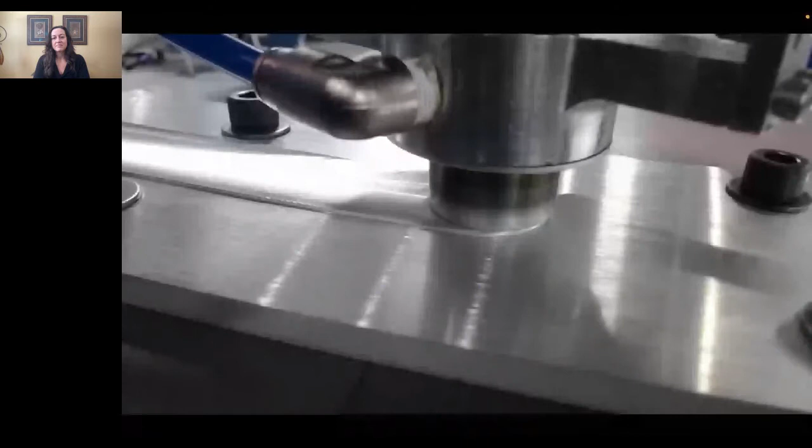So here's your substrate, simple fixturing. And then you'll also notice right away that we're in open air, making this very large part - a 10-foot cylinder in aluminum 6061. I heard someone just ask Miranda about that. So we are printing here in the 6000 series, and that's about 3 meters in diameter.

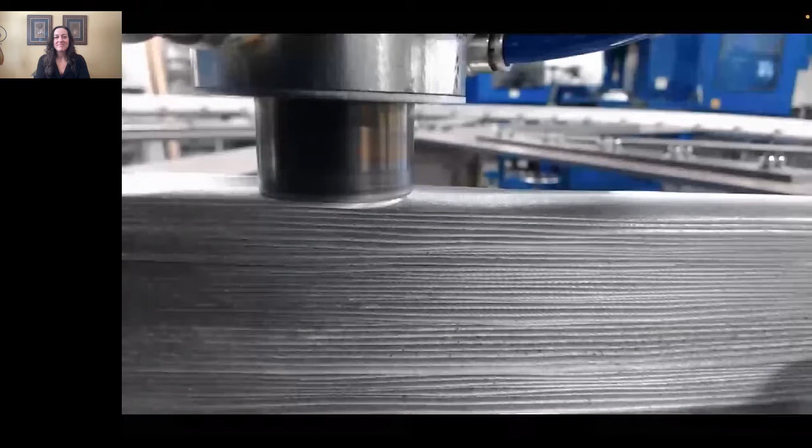Really simple concept. This material is under force in the z-axis and also is benefiting from shear forces that are created during the rotation of the tool. This allows us to put enough energy into the material that we're printing for it to plastically deform, and simultaneously to put energy into the material we're printing onto for it to plastically deform just under the point of deposition.

This allows these two materials to literally be stirred together. You can see discrete layers here as you stand on the outside of the part, but this outside edge will be machined away. And if we were to look at a cross section of that material after the machining away of this exterior skin, we wouldn't even be able to tell that it had been 3D printed. There would be no evidence of these layers. The microstructure will be uniform through the layers and in every direction of the print.

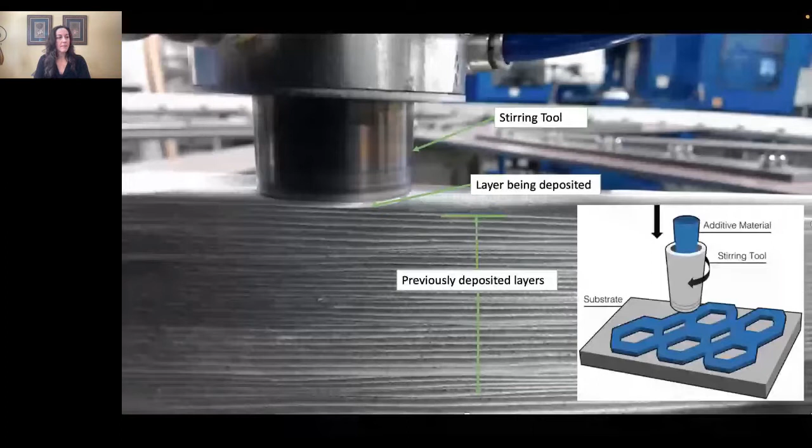So in terms of the program and the opportunities that Meld offers, and in fact where Meld's place is as a process in the AM market, it all comes down to the fact that it's a no-melt process. It's just another tool in the toolkit, and really on one end of the spectrum in terms of size and print rate. We make trades all the time, and so we can talk about some of those in a bit. You saw the high print rate.

We talked about fully dense, wrought properties, great properties from the printed material, and we talked about its simplicity. The great thing about a simple process is that it lends itself to predictability and repeatability. And we'll talk more about what you can print with, but this technology has so much freedom for the user, so much flexibility.

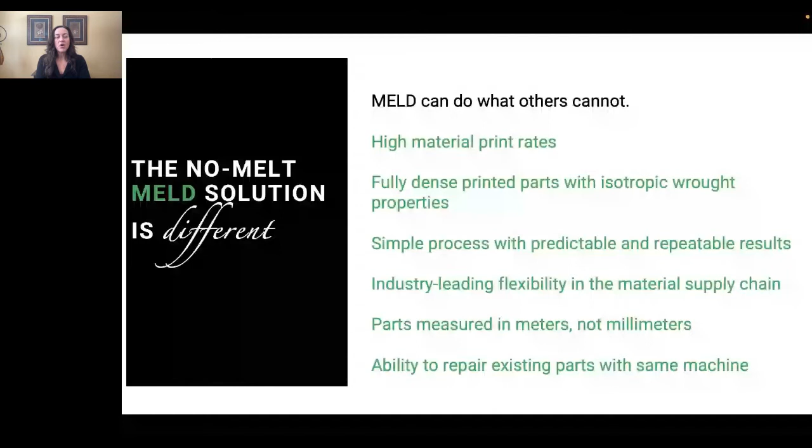This is a great time to navigate around supply chain challenges with the materials available to us. And we looked at a record-breaking part being built. We feel big is beautiful, and that meld was made for parts measured in meters, not millimeters. And one thing I'm personally very excited about is the opportunity, with the same machine and same process, to conduct repairs. Whether it's cast parts or forged parts, it doesn't matter. You have an opportunity to put a part on a machine in open air and add back material. And with sustainability top of mind for all of us, this is a great tool for that.

So let's talk about how this technology is being used for the world's largest printer, and how big is the world's largest printer, and whose printer is it? This is something that we're so excited to be a part of. There's a team of people working on it, but ultimately it's being led by the U.S. Army, and some of the information I'm about to share is courtesy of the Army.

The program is focused on designing and manufacturing now a printer with a build space of 20 feet by 30 feet by 12 feet in height. The equivalent is just over 6 meters by 9 meters by almost 4 meters in height. Really mind-blowing dimensions. So with this printer and the Meld technology, we will be printing parts at a scale never seen before.

And when I say parts, this is what I mean. I mean entire ground vehicles. Very, very excited to share this with you all.

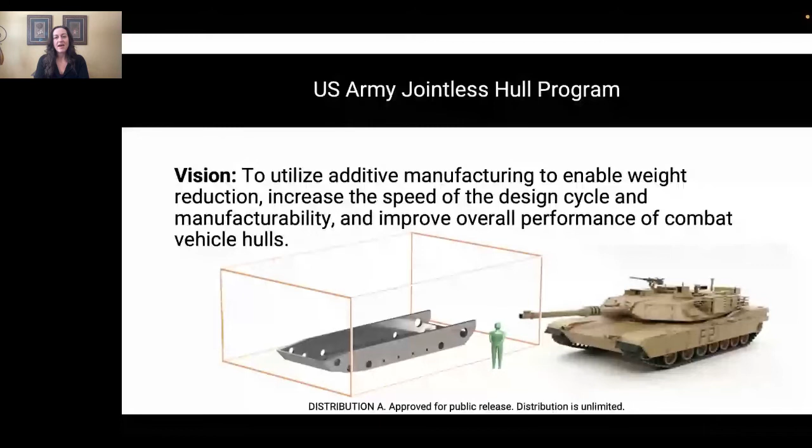So the program's objectives are very simple: to build a tool that allows printing at this magnitude, to develop the qualification and expertise in parts and alloys using this technology at this scale, to utilize the Center of Excellence for Advanced Manufacturing at Rock Island Arsenal for the printer and the development, and also to leverage a smaller scale printer in which some of the qualification activities can be conducted, and then to print and utilize this technology.

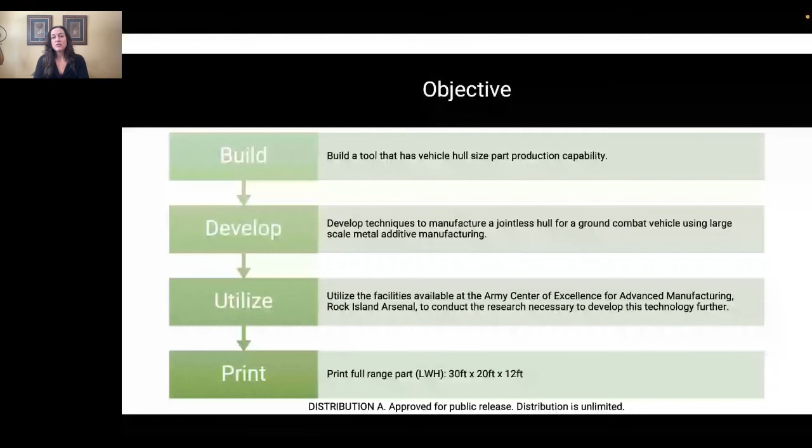So when we think about the considerations for which technology should be leveraged for a printer of this scale, many of the same objectives that probably all of you consider in your manufacturing responsibilities were considered. Size - it needs to be a technology that can print parts of this size. When we're talking about gigantic parts, speed of print matters, and materials is a special consideration here because this is a tool for generations to come to leverage. So it needs to be able to use today's materials, tomorrow's materials, and the future's materials.

And this is something that Meld was uniquely able to offer to the program. Quality and performance are always of utmost importance, as is cost. And cost is about the process itself, about the logistics around the process, about the infrastructure for the process, how much power it might take, or if it requires atmospheric shielding, but it's also about the raw materials. And one of the great things about the meld process is that off-the-shelf material can be used.

So as I mentioned, these are solid rods that go into the printer - not powder, not wire, not a material whose chemistry was especially developed for additive.

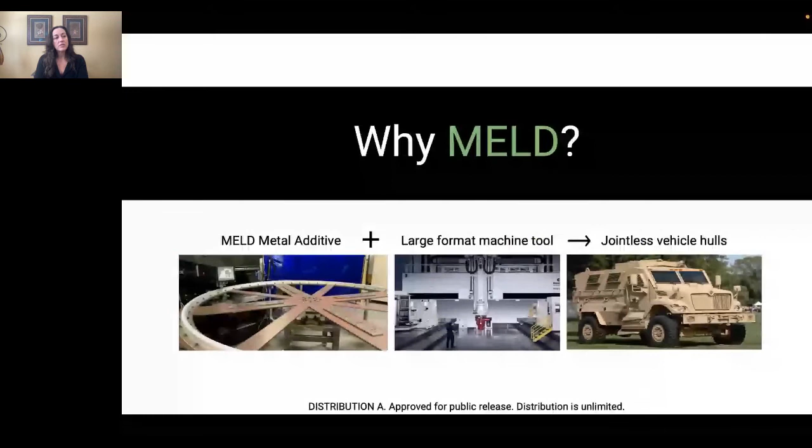So these are some of the considerations and reasons why this solid state process is really well suited to be the additive tool on a large format machine that will also be subtractive, to build these jointless vehicle hulls. Some of the other things considered and observed about the technology during the competitive process in which it was selected was the demonstrated ability to make complex geometries and also to build larger components with very thick wall thicknesses.

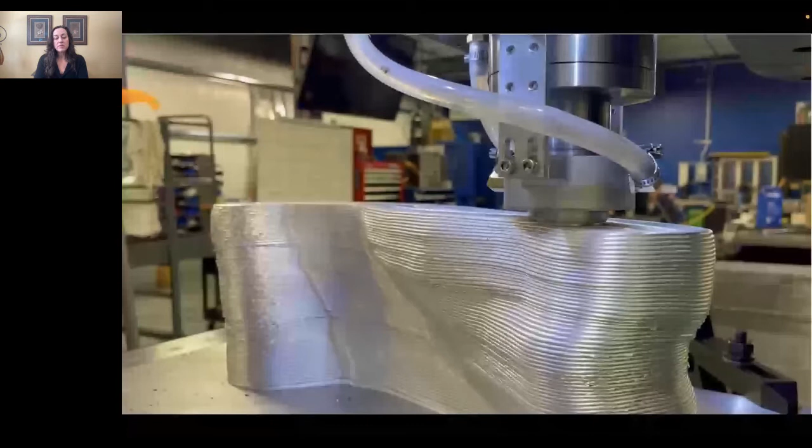And here again, we can see open air printing and that stirring action. We talked previously about the dynamic recrystallization that occurs at the point of deposition. What this allows is grain refinement, and grain refinement has a lot of good properties and outcomes for performance.

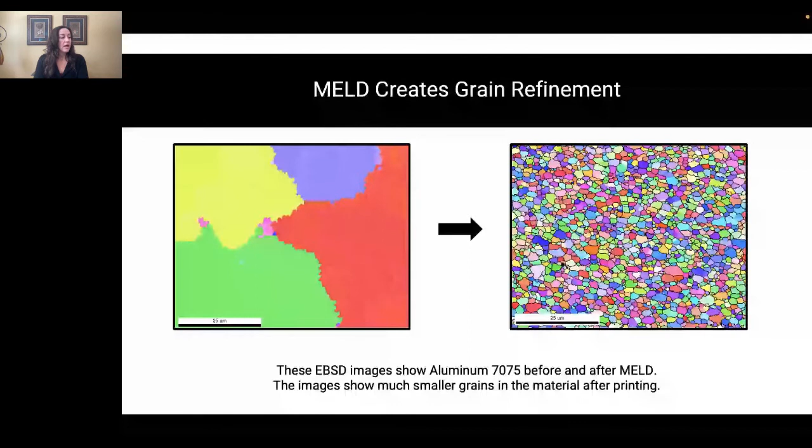Like greater wear resistance, greater corrosion resistance, and often greater strength. And this is a contributor to what we see in materials where we have qualified against forging standards. And this, of course, was of great interest to the Army in the selection of meld for the printer as well. So aluminums, magnesium great for lightweighting, titanium great for lightweighting, but stainless steel, nickel-based super alloys, all printing to a forged standard.

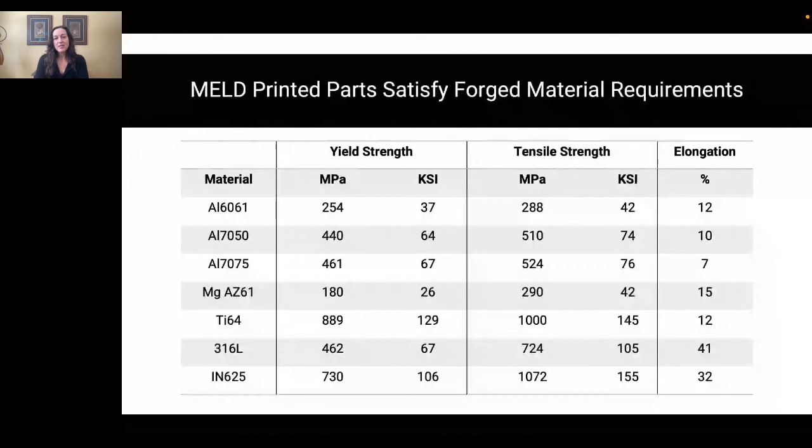And I know it was asked about aluminum 6000 series in the previous presentation, and that is something we can do. That's one of the great things about a non-fusion based process is so many more alloys are available to us to print. You can see here a 7075, but 2000 series as well. These are fantastic alloys, especially for the aerospace industry who is interested in utilizing them for lightweighting. And lightweighting is relevant not only to aerospace, but to space, to ships, to trains, to ground vehicles. Lots of opportunity around these alloys, and now we can really unlock their potential by combining them with a 3D printing technology.

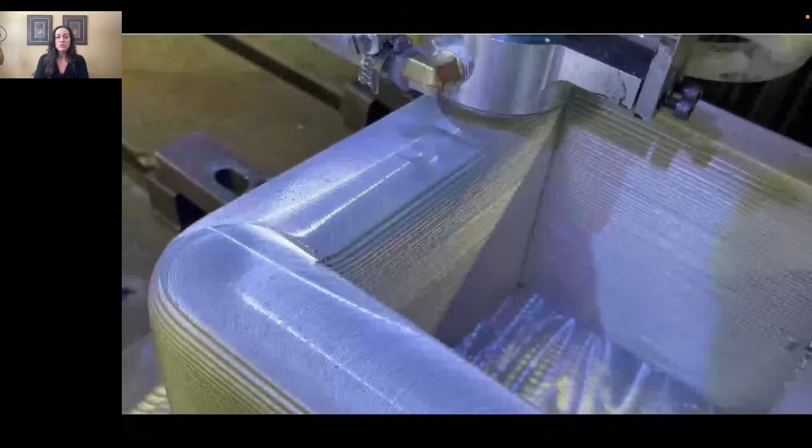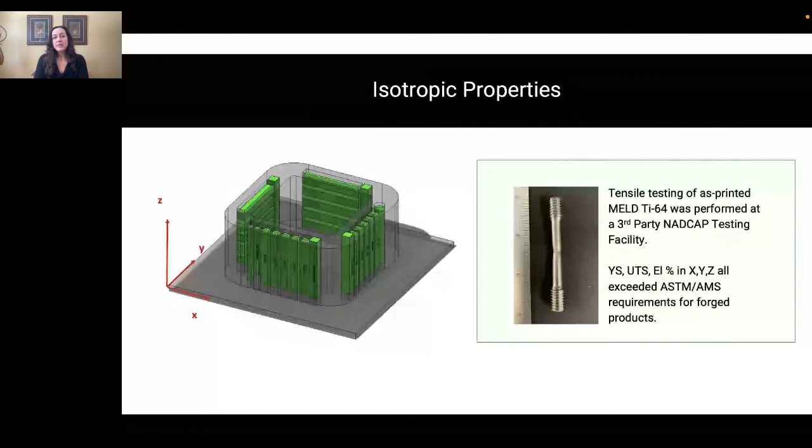There are many more attributes to qualify against, but this is always a great baseline. So very much of interest and something that we'll be seeing done on customer printers and these Army printers as well. But as I mentioned, the most important thing that we can offer is the ability to have the user print any material that they would like. And we've certainly demonstrated many at our facility in Virginia. This is an ever-growing list, and at this time, there's no known limit to metals that can be printed with meld printers.

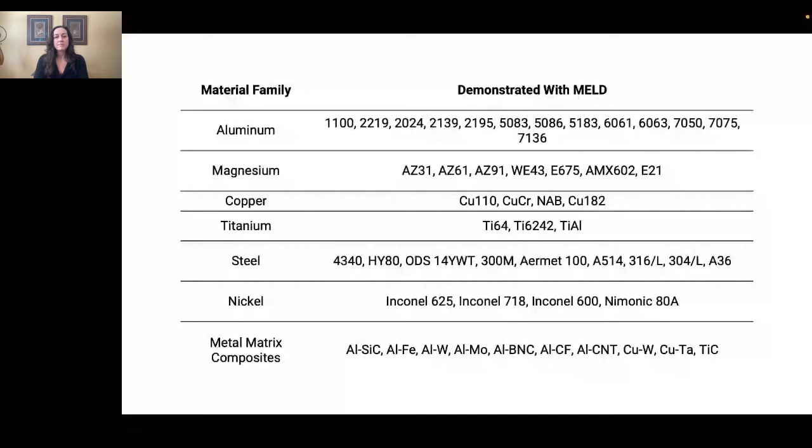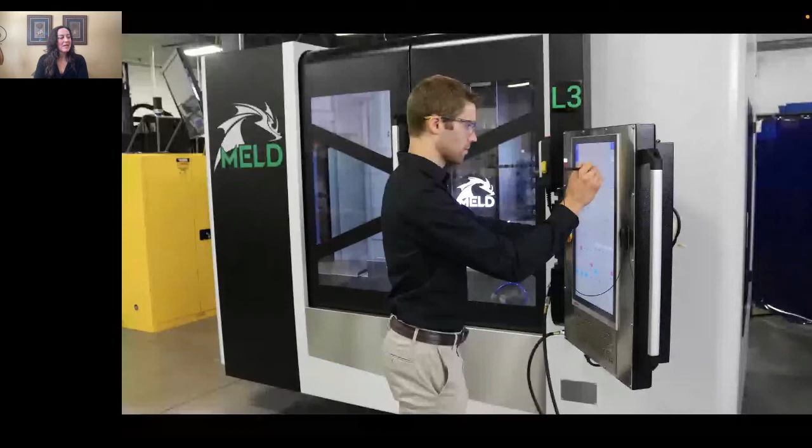Having a lot of knowledge about materials and Meld performance is difficult with a new technology. So I've shown you some of the things that we've done. It has been helpful to have the credibility of such great organizations awarding the technology and the company honors since we got started in 2018. So this has definitely helped us to demonstrate what's possible.

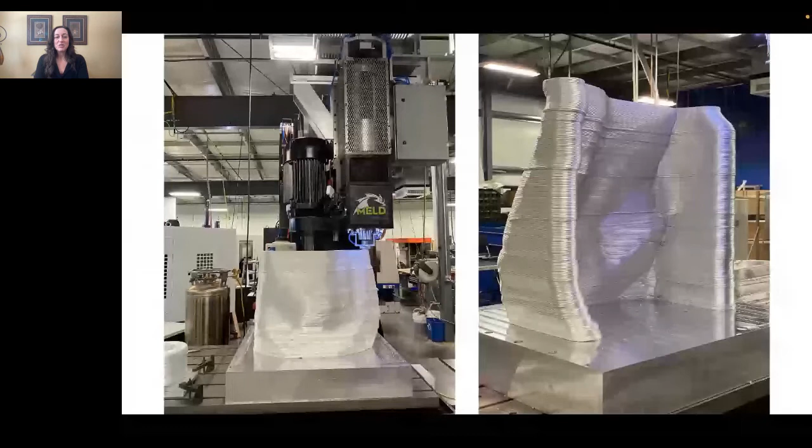Of course, nothing says it like printing things. So these are some of the initial parts that we were able to print for the Army in conjunction with this program. And you're looking at a near net shape of a vehicle component here. This is what we used to think of as a big part, but now we know they'll be even bigger very soon.

And just to show how important it is to be able to take ideas from concept to printer, I wanted to show everybody - I'm sure you're familiar, but if you're not, it's nice to see what a slicer can do. It's important for Meld customers to be able to take their parts from a CAD model, for example, and move it through a program that helps define how it will be built on the machine. So this is the part we just looked at, and we're going to see it being built layer by layer in the slicer software environment.

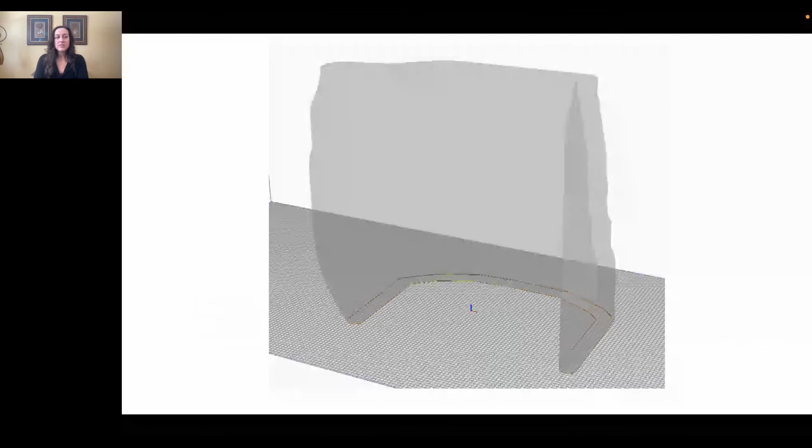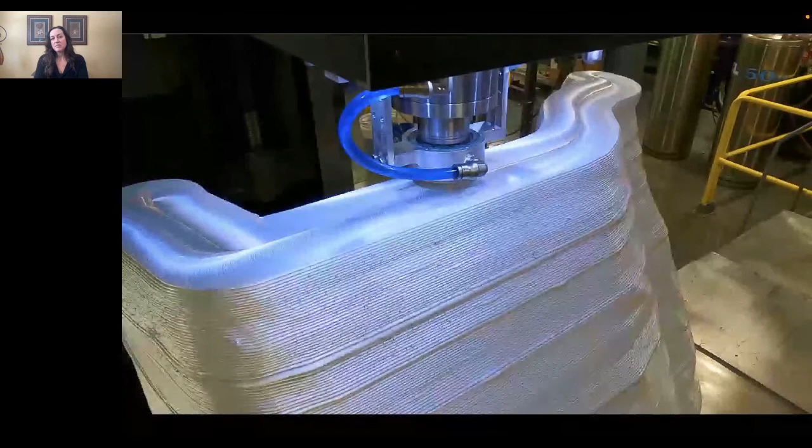And actually what we're watching is the tool path. So this is 2 tracks overlapping each other per layer on the build. And what that looks like in reality is this. This is a great demonstration of how you can build even bigger wall thicknesses with the ability to do overlapping tracks. This is something that we would have tested out at our facility, determined how much overlap is needed, and then done some analysis just like we looked at to verify that that material in that overlap area has the same quality as the material of a single track wall.

It's been really great in our facility to be able to run these printers in an open air environment. The solid rod filler material allows us to completely eliminate powders from our facility, so we eliminate a lot of safety equipment necessary to manage powders, and we eliminate the hazards. Without atmospheric control around this machine, we're also operating in a very green way, limiting the use of gases.

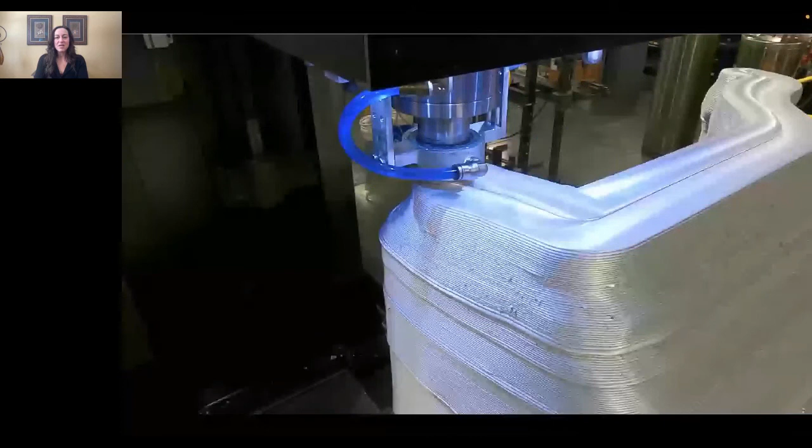This is basically a CNC machine that puts the chips back on. We build the part in a very machine shop-like environment with machine shop-like tools, and our operators are former CNC machinists, so it's really very easy to use.

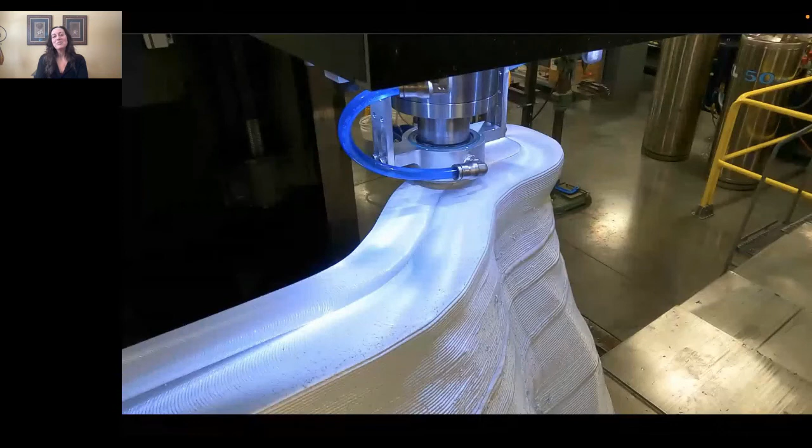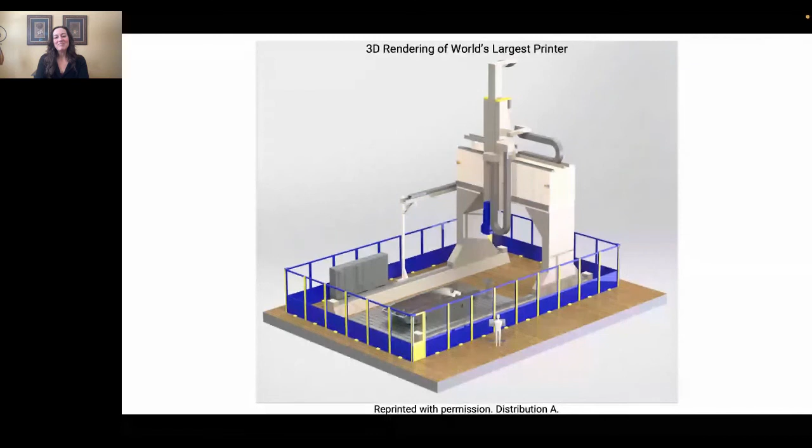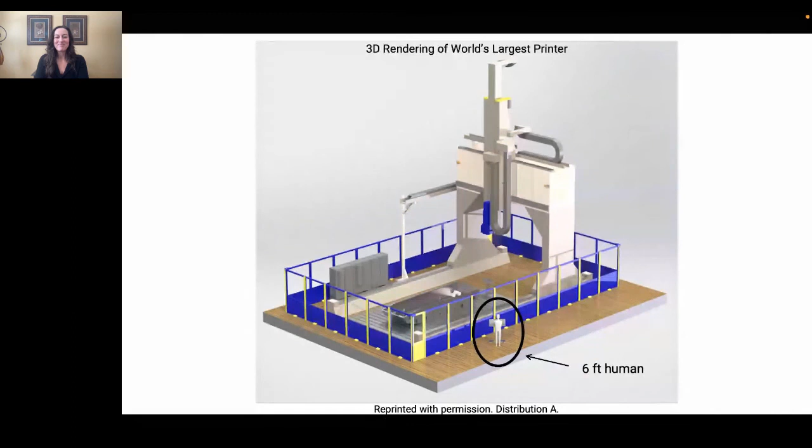So as I said, this is what a big part used to look like. This is what a big part is going to look like, and this is what a big printer is going to look like. This printer stands at 42 feet tall. It will come online at the end of this year. I'm very excited to give you a picture of me standing in front of this machine, pointing out here's what a 6 foot tall human looks like. So just give yourself a moment to put yourself right there and imagine watching that part being printed by this equipment.

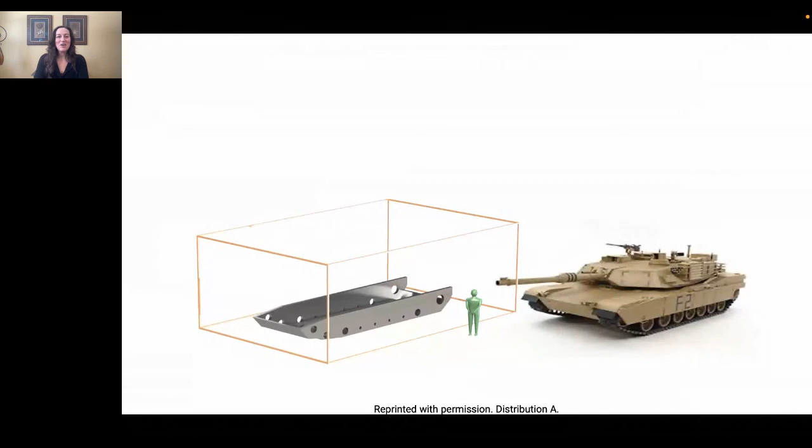And if we look at that part that's being printed there, I'll bring it full circle back to where we started. So this is printing at a scale never before imagined. I couldn't be more excited about it. The Army believes this will be a game changer, and so do I. Thank you so much for letting me share it with you.

Thank you. That is just mind-blowing. I cannot wait to see this technology. And I'm not that far from Blacksburg, so I want to come see it. So please come, let me know.